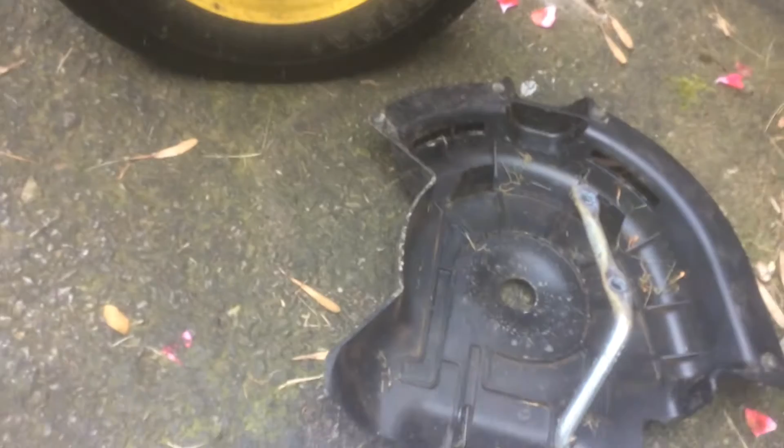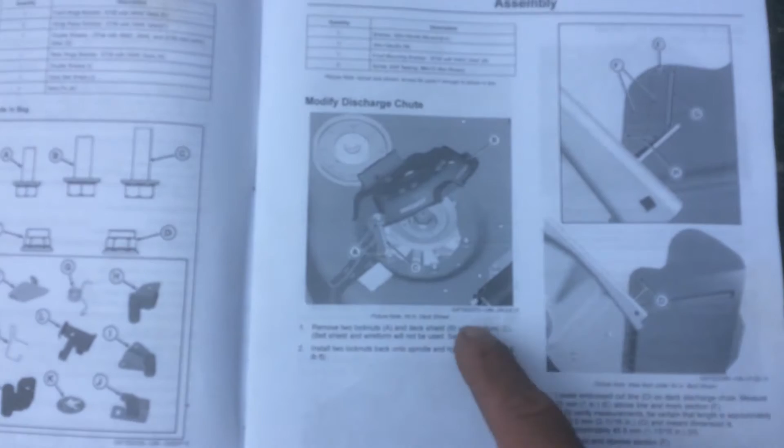Alright, next step. So I removed this shield. There's two bolts, these two, and in the instruction manual they show it which looks like it's towards the back side, these two bolts, but it's really these two bolts. So I don't know if they just used a universal picture, but I got the gist of what they wanted to do. It's basically remove that shield.

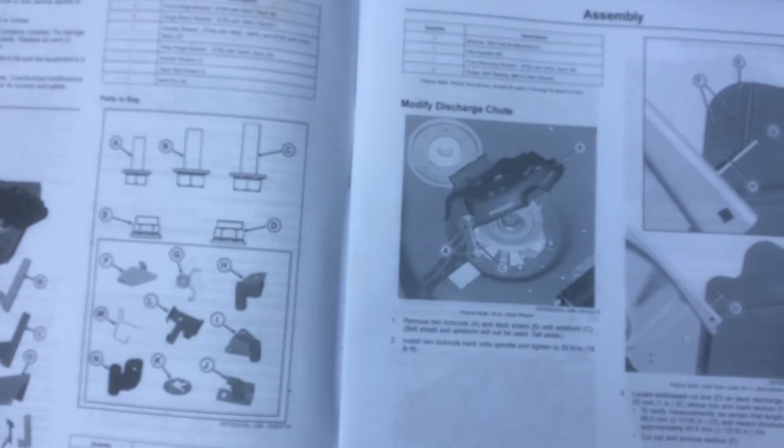And then you put the bolts back in. Hopefully they're right about that and I don't have to take them out again, because I'm not sure what size they are, but it's got to be a metric, and I was able to use some English.

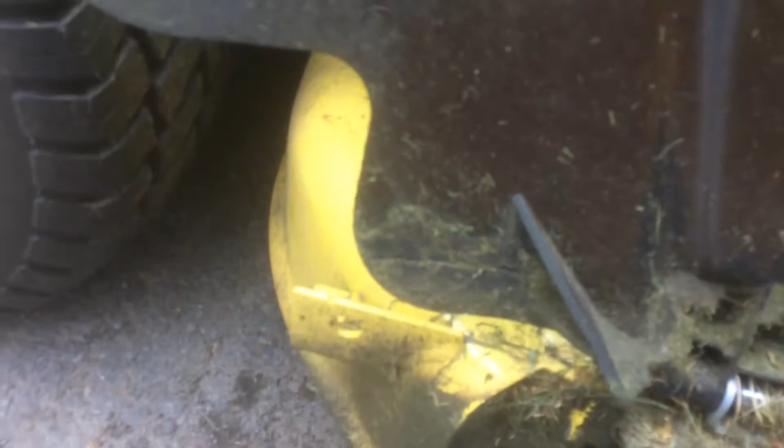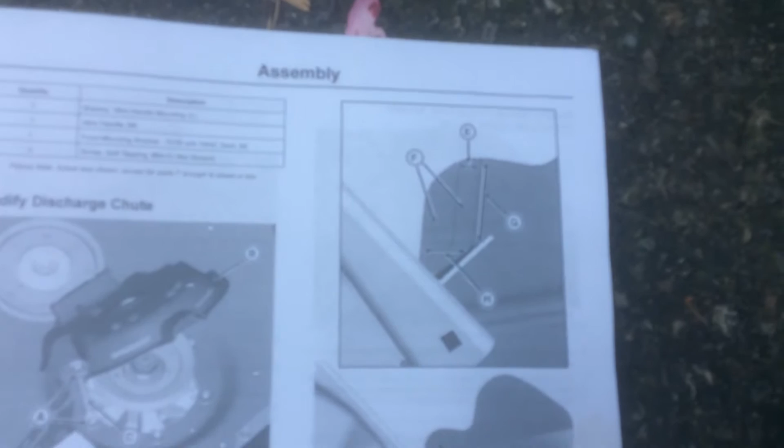But next step here is to modify the chute, and they reference this horizontal line right here, and you're gonna have to cut and make a cut, and it's not too clear, but that's what they tell you to do.

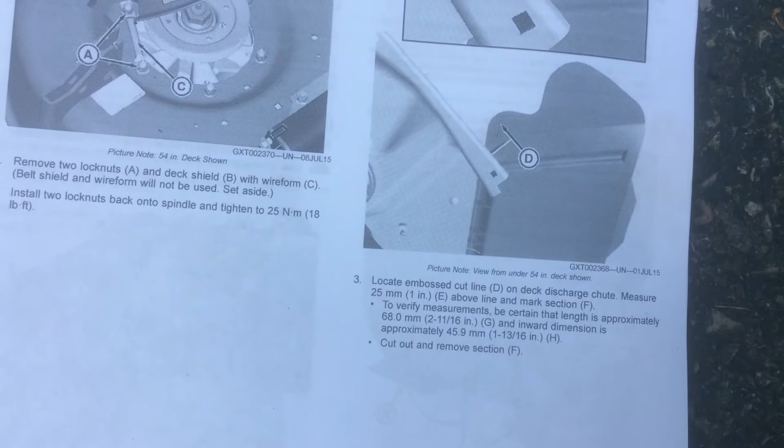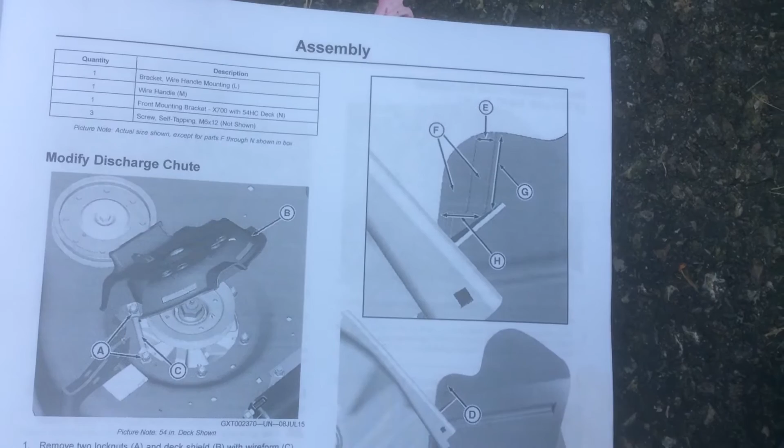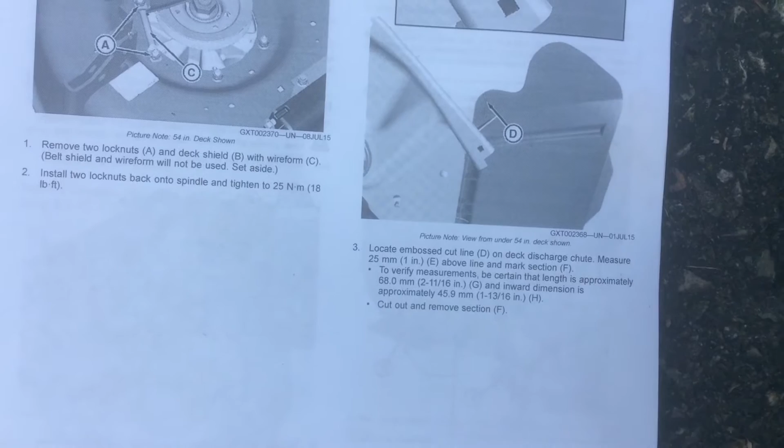So you locate D, which I just pointed out, and then you got to cut 1 inch above that, marked section F. You go up here and there's like two extra lines, so I don't know. And there's H in there too, inward dimension, I don't know, 1 13/16. I don't know how you measure that, but maybe I'll go 1 3/4 or something.

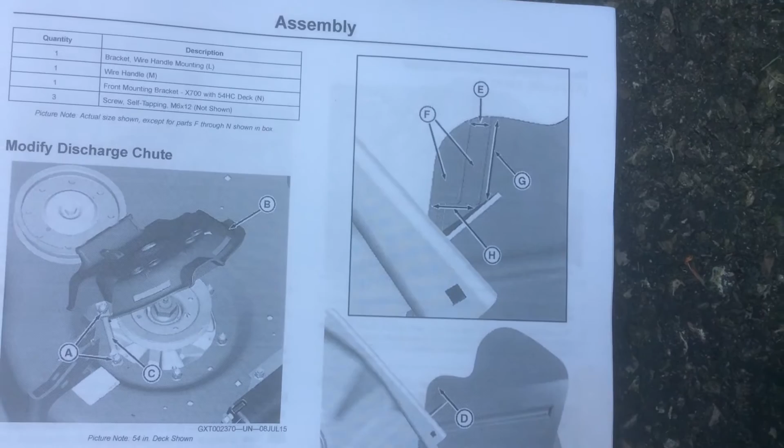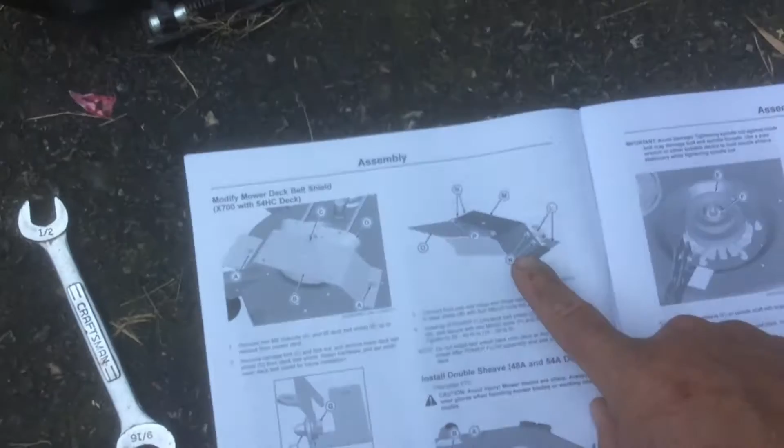And then you cut out and remove, I guess, that whole corner. So I don't think it's critical, but it's got to be there to make way for this other bracket that goes on, which again doesn't match what the instructions show. They show all this stuff here and here, and I haven't got that.

So maybe this is old, and then they came up with this guard to guard the pulleys, and I'm not sure how that mounts, but hopefully we'll figure that out.

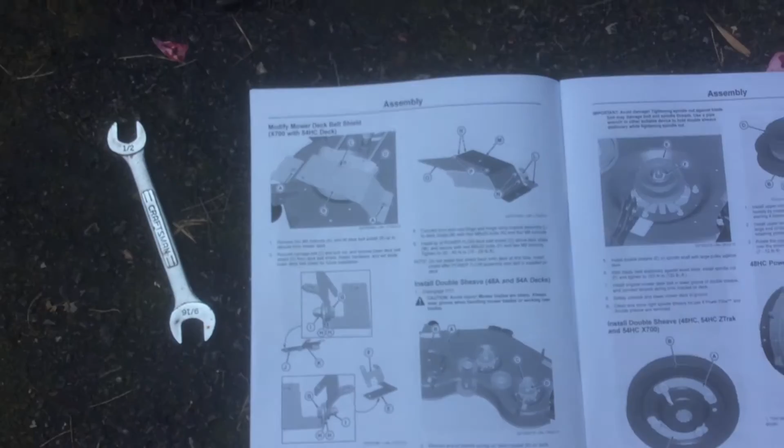Alright, so with, I'm going to use 1 inch, I think. Nope. What did I do with it? Oh, here it is, 7/8.

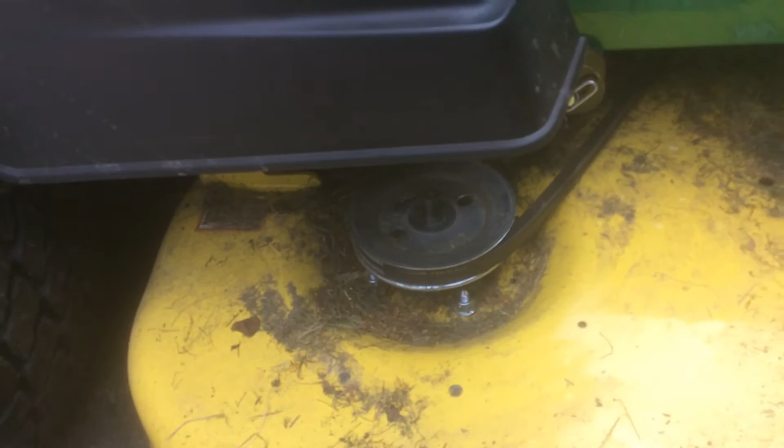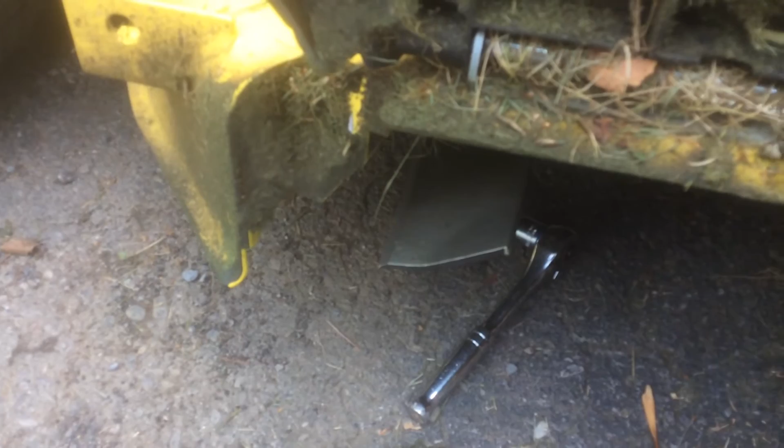Box wrench. I'm going to go counterclockwise, just like you do loosening a bolt. And then with my left hand, I held onto the blade, and you get the back side of the blade, not the sharp end, because you're going in counterclockwise direction.

So I just put these gloves on here, just while I did it, and it did slip pretty good, so just watch your knuckles.

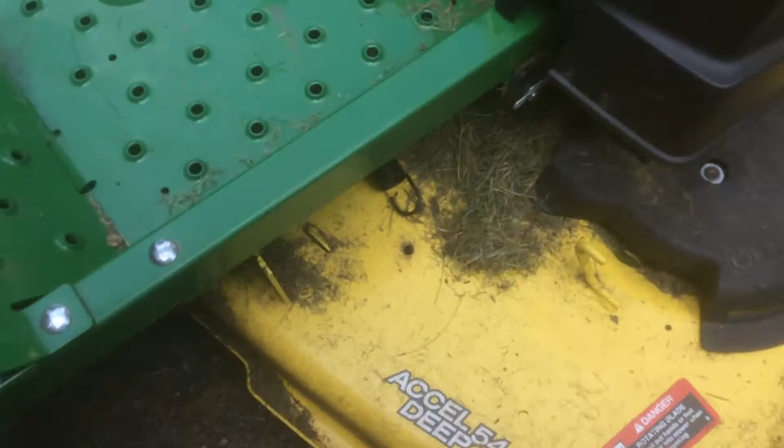But I loosened this spring here, hooks onto this hook, and the whole belt gets loose. So that's real easy, it's not really hard to pull on to loosen it. So now the belt's loose.

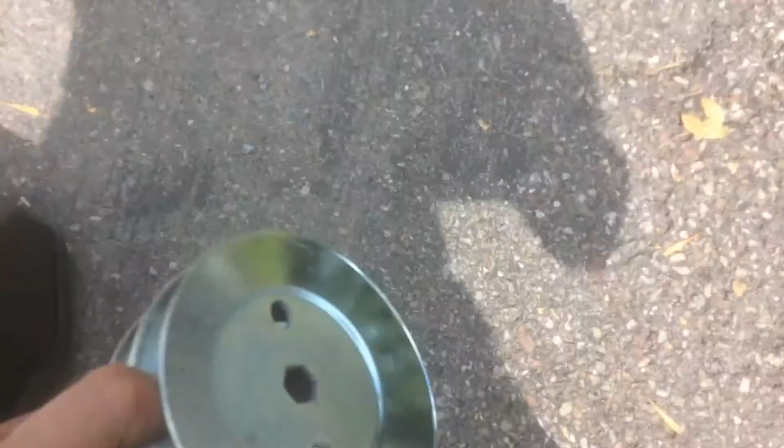I got the nut off. I'm going to pull the sheave off, and I'm going to put this double sheave on. So I'm assuming it goes this way on there, but I'll verify that as I take it off and put that one on.

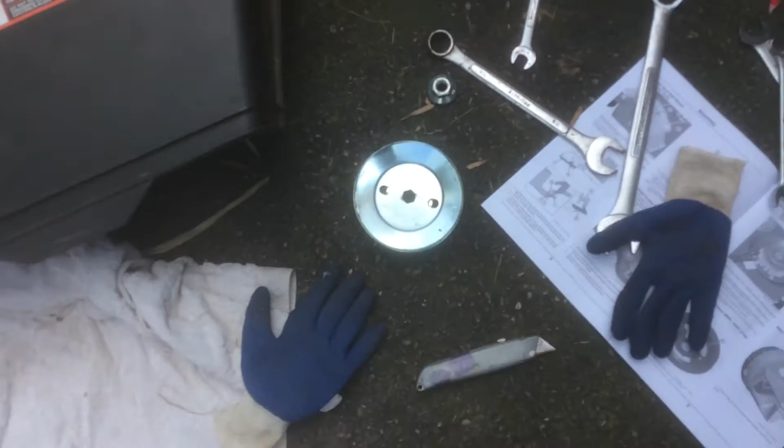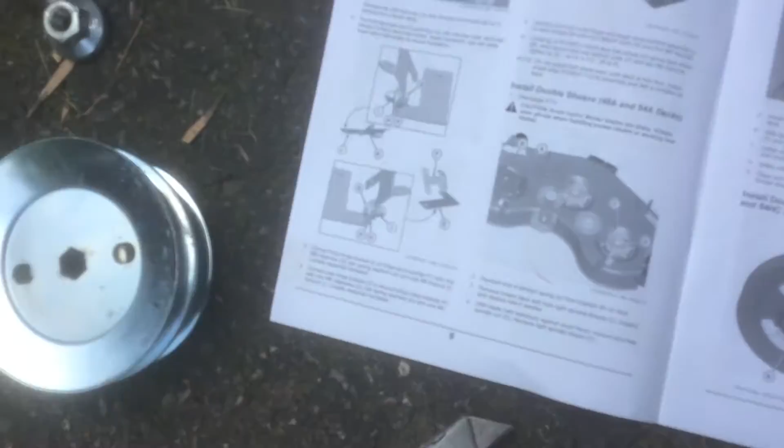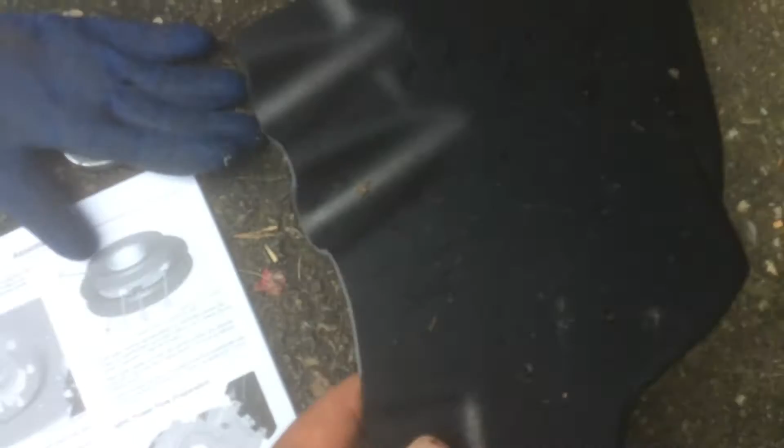The instructions aren't too helpful because I got all these brackets and nothing seems to match what I have. So all these brackets down here mount on the chute end. I don't have any of this stuff, and I can't seem to find this cover, but I'm pretty sure it goes over the top of this.

Oh yeah, I cut the notch out, so here's the notch. I just went up 1 inch parallel to the other line that was there. It's in the instructions, and then...

Okay, well, there's my little helper, Mickey. Hi, Mick. He's my little sitting towel here.

But anyways, here's the double sheave and the deep end. So I was wrong, it goes that way.

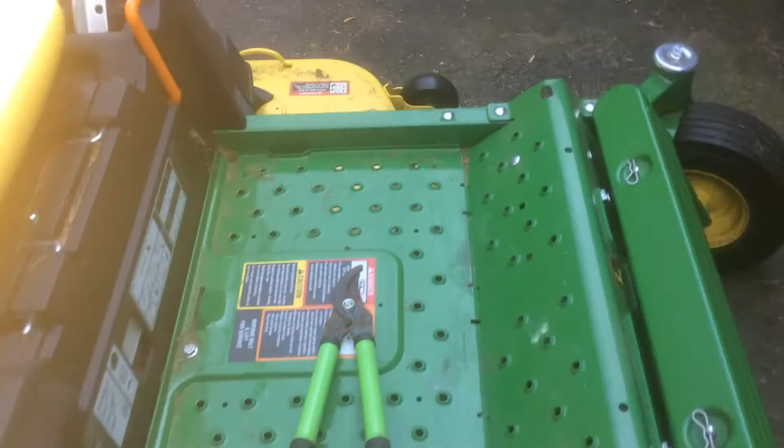And installed it with a 7/8 socket because it's so deep you can't get that same wrench on it. So I used a 7/8 socket, and then just put the spring back and tighten the belt. So the spring went pretty quick.

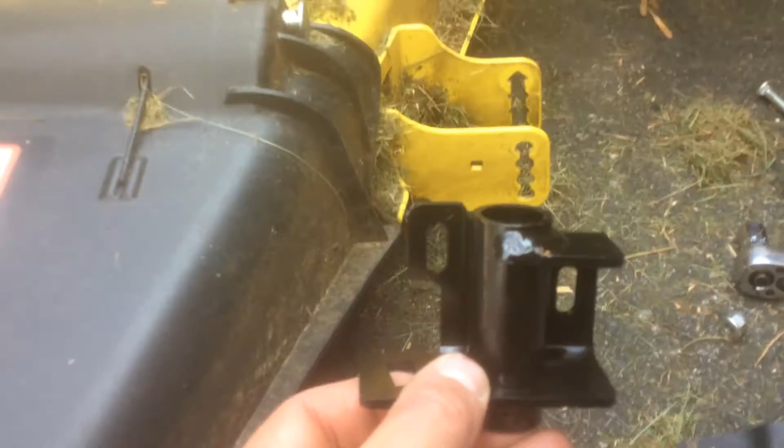So next, what we're doing is I took this front wheel off, and then this bracket here mounts in these two square holes, that one there and that one there. And just a couple of shoulder bolts, and we'll install that bracket, put the wheel back on. Should be pretty quick.

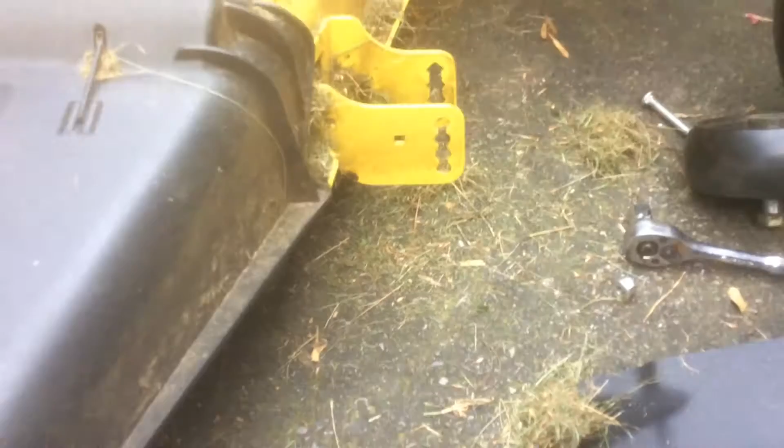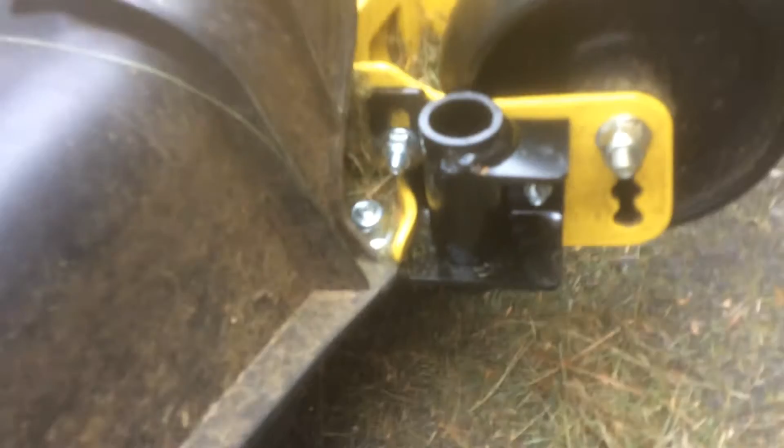Okay, so bracket's on. There's actually 3 bolts, a larger bolt here, and 2 smaller bolts here and here, lock nuts, and the wheel is back on now. So next thing is to start working on these brackets that go back here. There's 2 holes here that I found that some of this mounts to, so we'll figure that out next.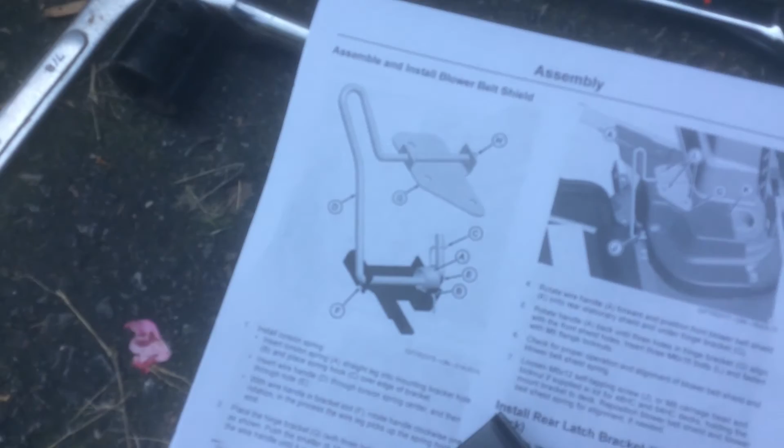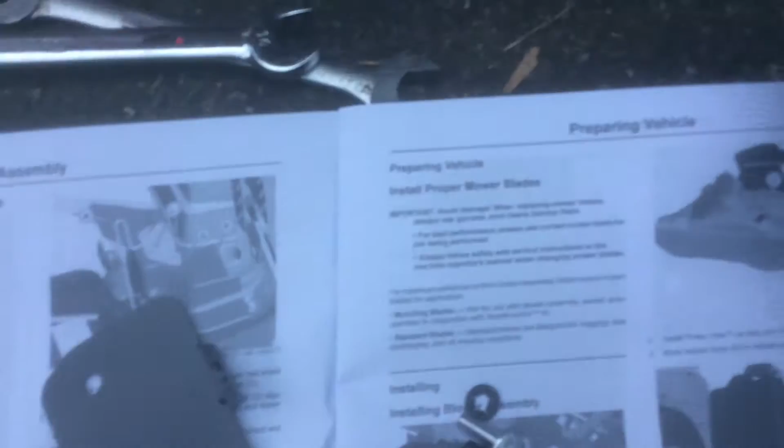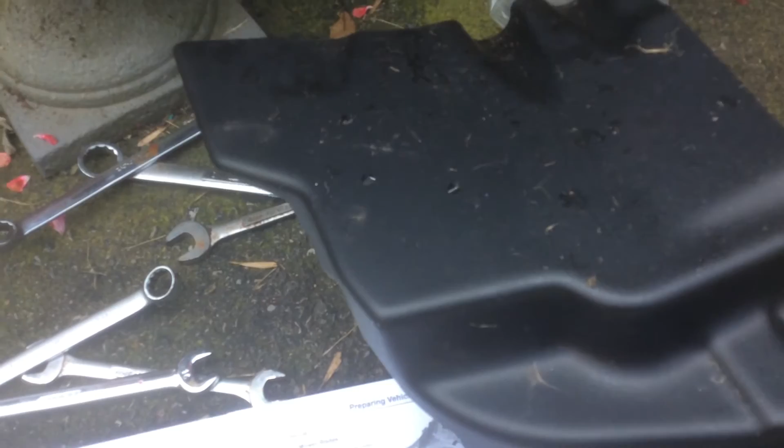Alright, so these 2 brackets hold this cover that goes over the pulley, and that's this. Here's this bracket that mounts in these 3 holes here, and this cover mounts over the pulley and blocks the belts from anyone getting caught in them.

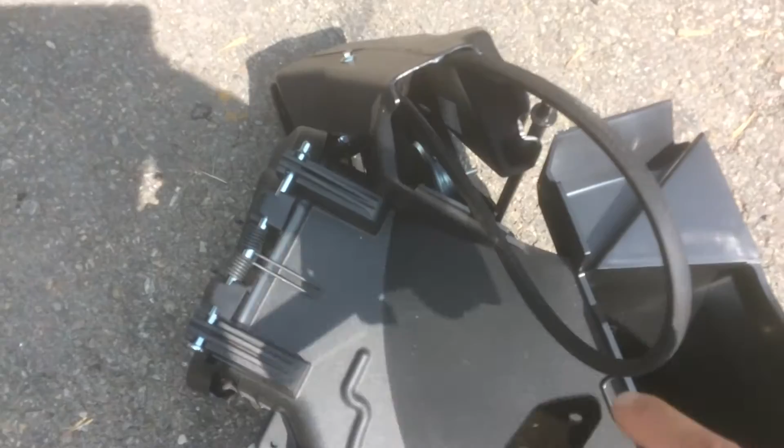So I'll be mounting that next, along with this bracket, which is a pulley guard. This mounts over here in these 2 holes, basically like something like that. So that mounts there, and then the other belt, this belt over here, wraps around the pulley. This is like the tensioning mechanism, I guess.

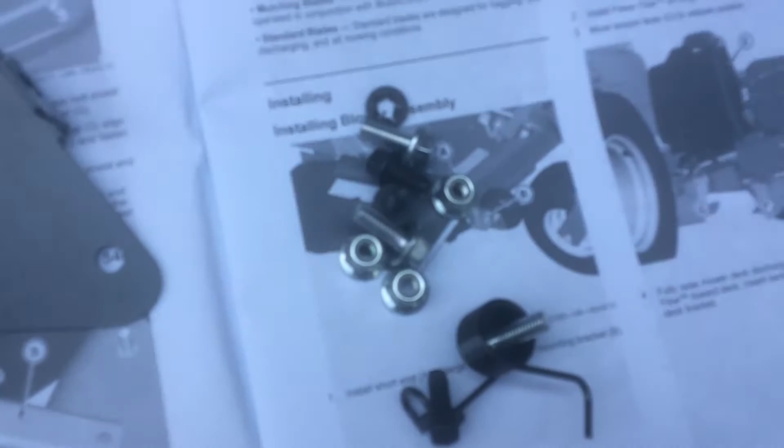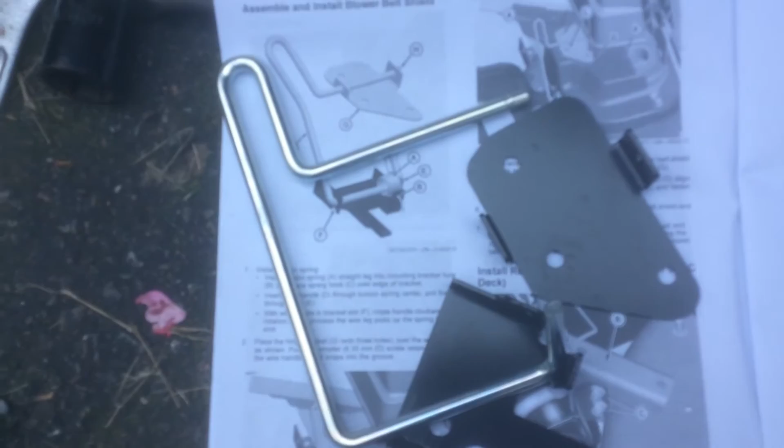There's a few parts left over. This is basically what I got remaining. And then this little wire form goes in there, something like that. So I'll put that together, and then we'll give you an update.

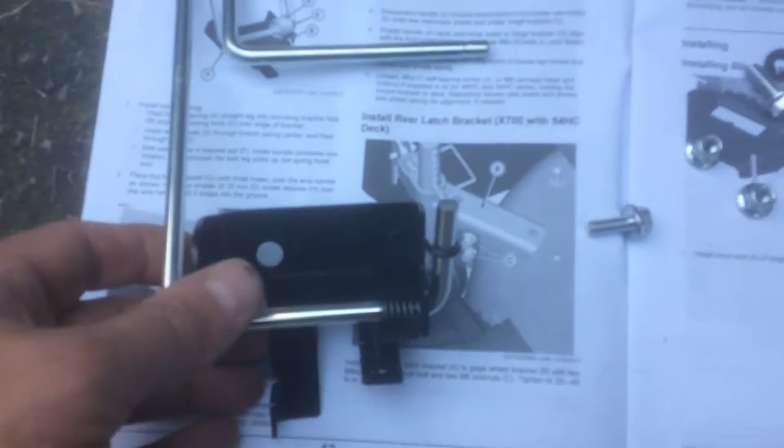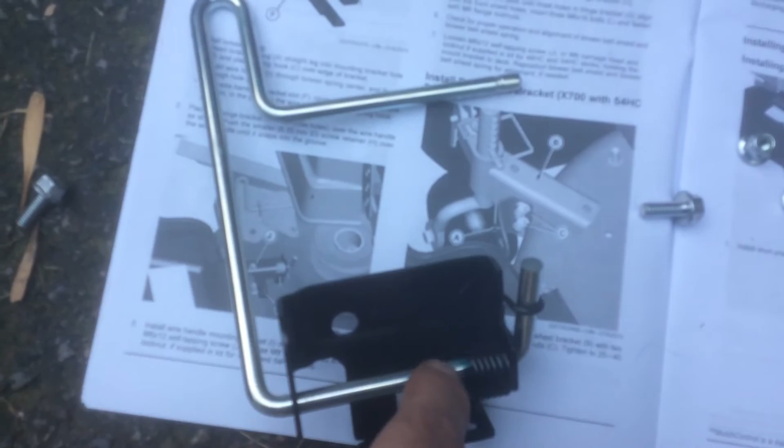So there was a little bit of thought put into this. You usually feed the spring, like they show here, down through this hole, and you got to snake this wire form through. There's a little notch out, so you're able to slip it out and then feed this in as well.

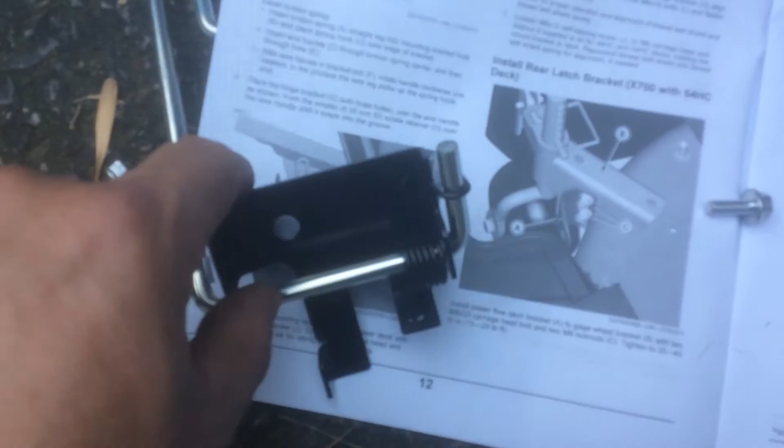Once I get the spring in the right orientation, I just put a pair of pliers, held the spring, and pulled it back towards this and looped it over, and that kind of loaded it.

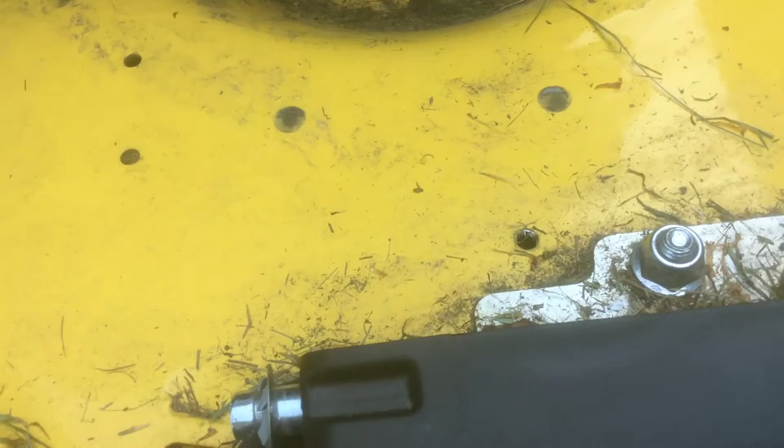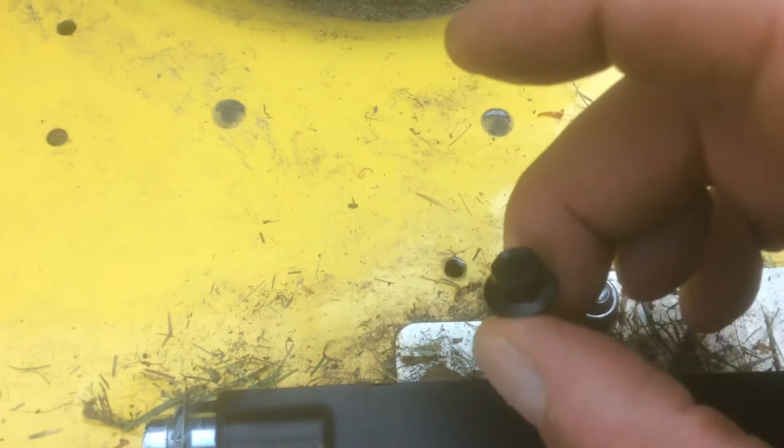Then what you do is you get these self-tapping screws, and there's a hole existing just like these holes here and here. Those aren't holes, those are just wear marks. There's another hole over here. There's these self-tapping screws, and you just kind of put them in the hole and with a socket just torque it down through, and it'll strip its own holes in.

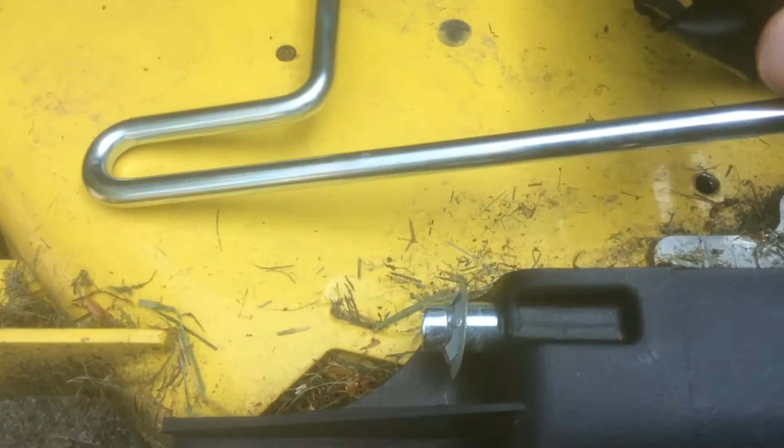So that mounts this bracket. This hole goes down into here, and this bracket is all notched around this little feature. So I'm going to put that in next, and then I'll mount that.

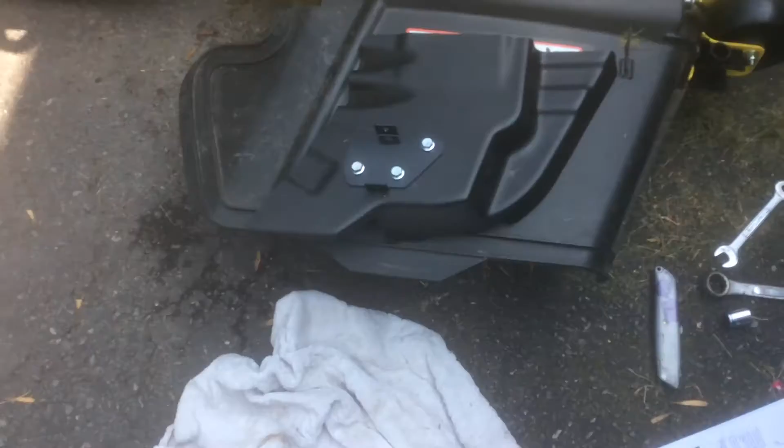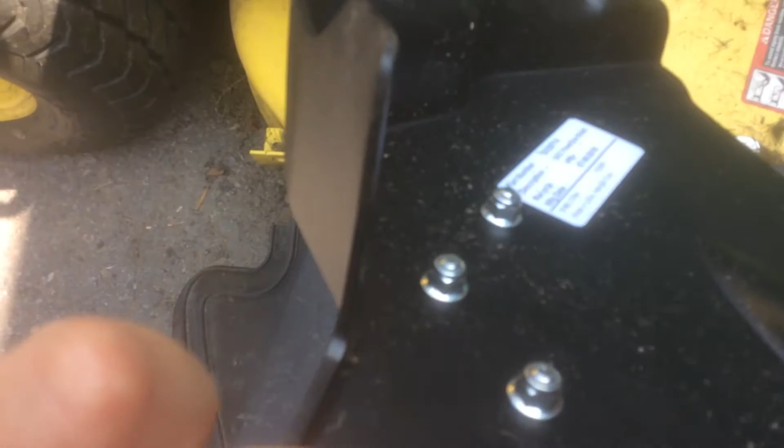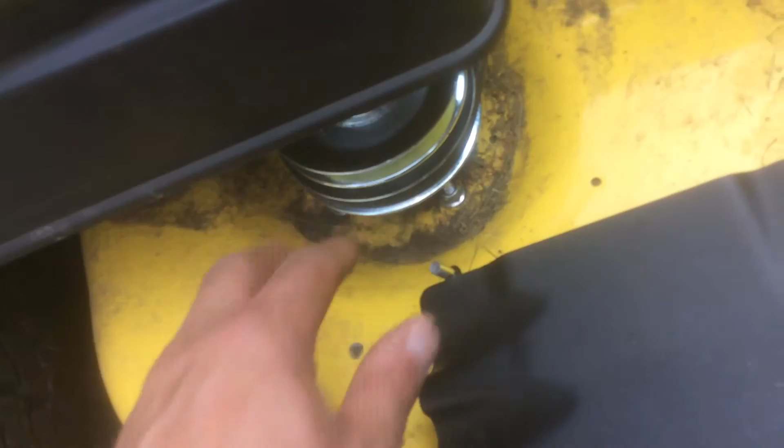So here's this all mounted. It's just one self-tapping screw, and then this wire form all spring loaded here. I showed you how to install that, and then install this bracket in the 3 holes, just 3 bolts. Then this, you see these 2 holes here, wire form goes on there, and I think it holds pressure down on this whole bracket over these sheaves, and then there's a little clip here, and I believe that goes on the end of this to lock it in place. So we'll put that on next.

Alright, so here it is installed. There's that little retainer back here, and this whole thing now slides out of the way, so I guess you can take the pulley off this feed blower here. So I'm hoping that'll be installed soon.

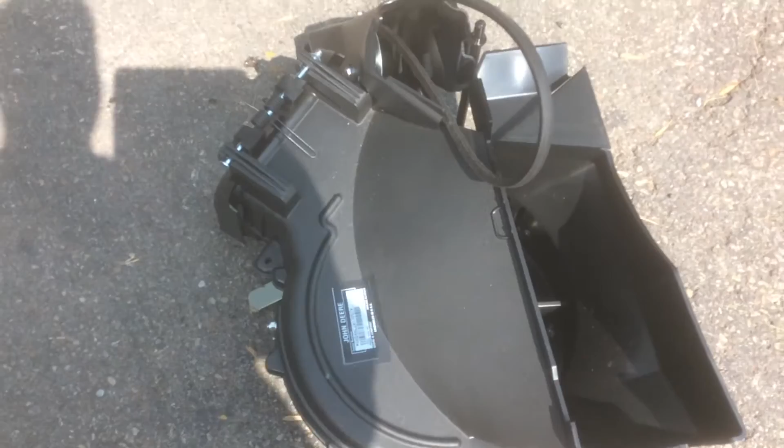So get the front bracket, get this cover, and now this little bracket that I showed you earlier will be going on. I'm assuming that's these other self-tapping screws here. I got one, I gotta find the other one. So we'll put that on next.

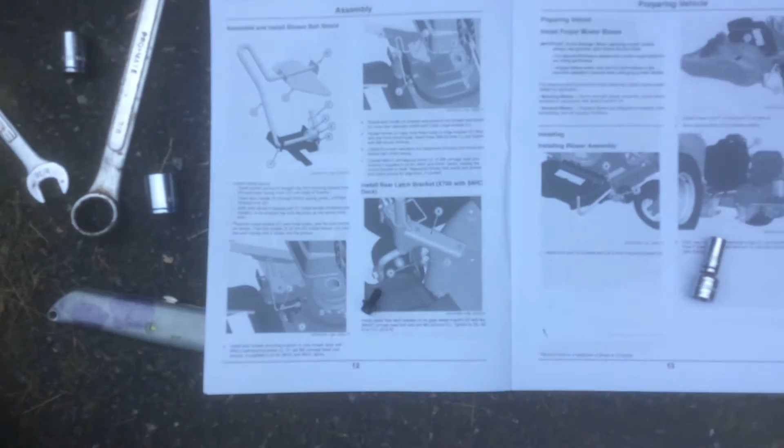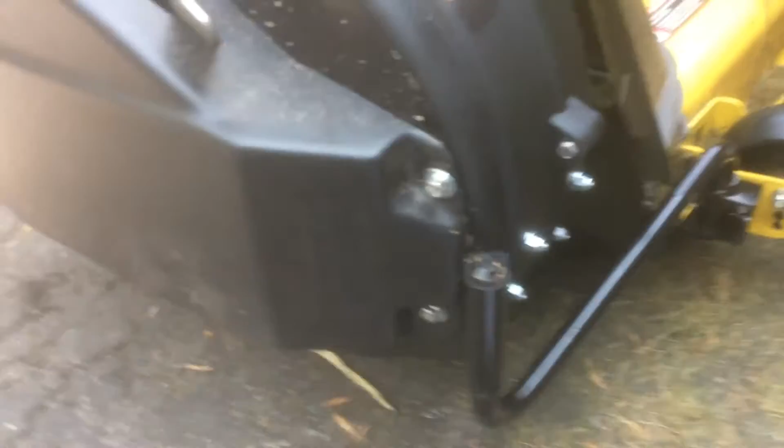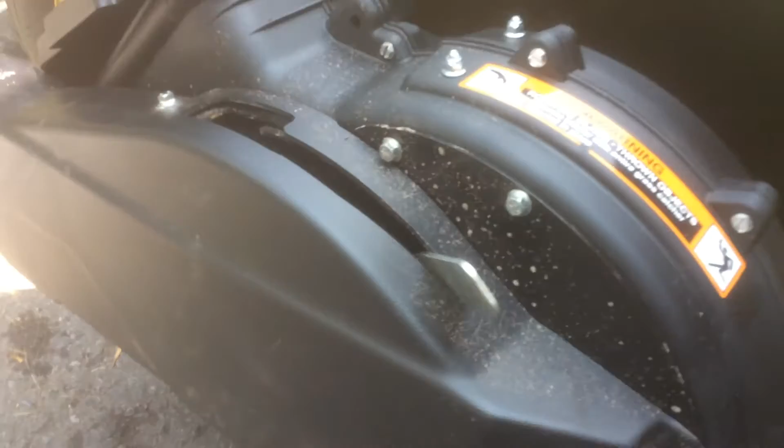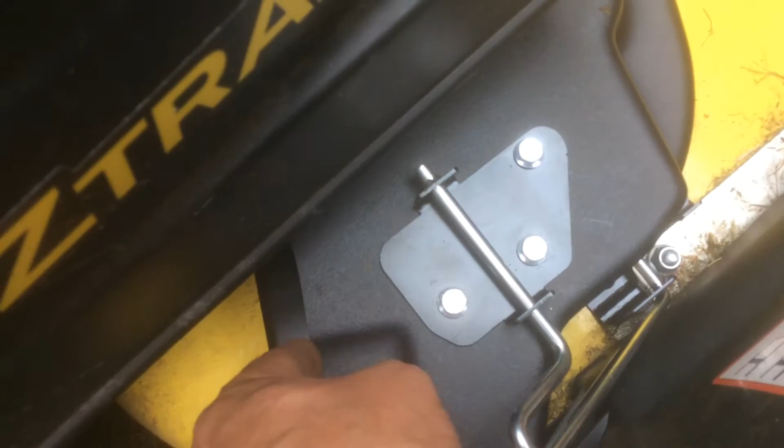Alright, so a lot's happened here as I went through. So there's this little bar that goes in this bracket in the front we put in earlier, and that goes into this feature on the blower. All that was on it, and this tensions the belt, so I loosened that up, and the belt feeds down underneath this cover here, which can slide out of the way so you can get at the belt, and it just flips over the top sheave. Make sure the belt's orientated correctly.

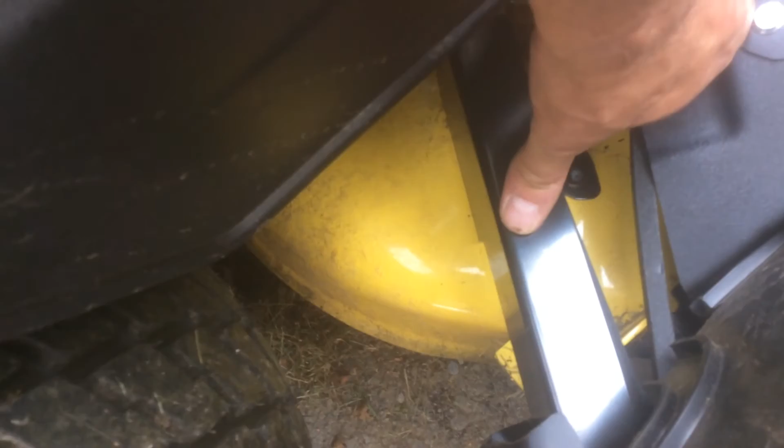I installed this side bracket down here with the two self-tapping screws, and that kind of protects the back side of the belt on this side. So that's basically it. Now I just gotta install the chute.

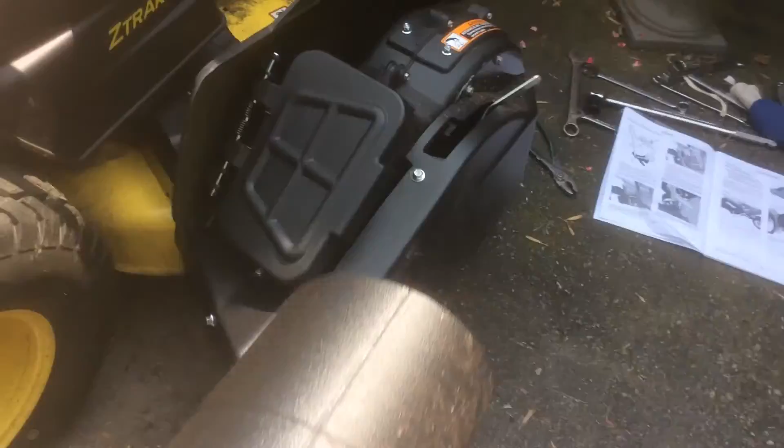So the chute just goes from this opening here, which you can see the propeller in here, and the chute right here. This goes in somehow like this.

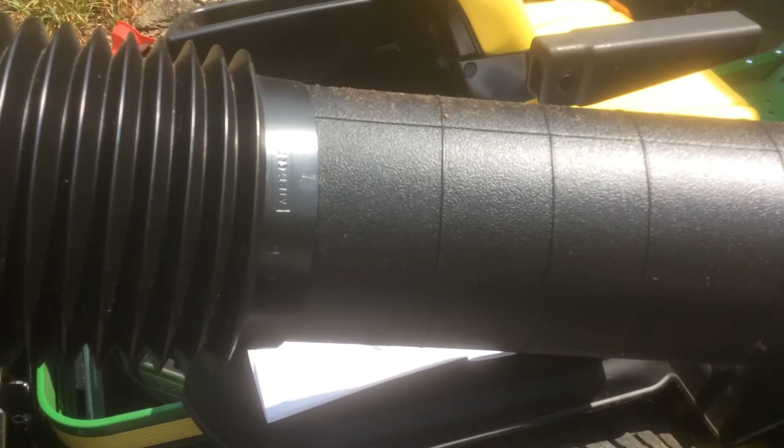Connects up to this flexible piece. It's got all these little rings on it. I don't know if I have to cut it off or not, but I'll look at that. And then there's this fitting here that locks it in place.